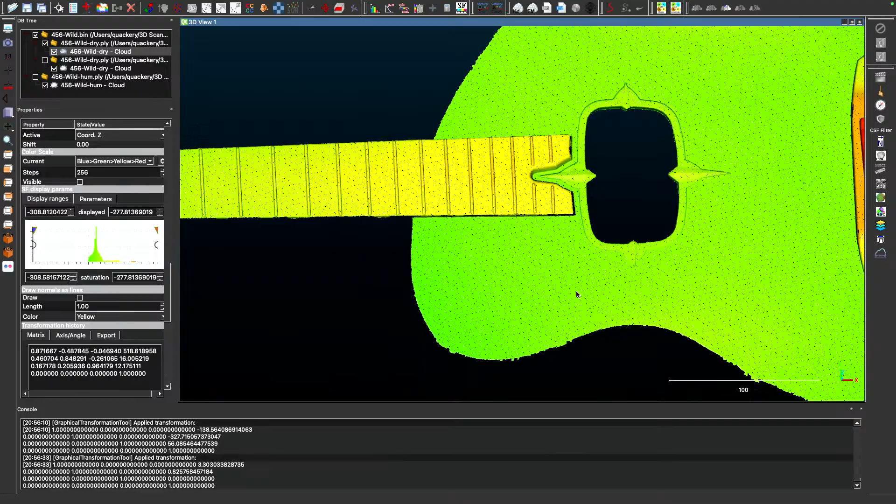But now we are going to look at the 3D scan. So we're going to look at two 3D scans. Aficionados in the house, hello to you. So two separate 3D scans that I made at two separate times, one before the rehumidification service and one just today. So why don't we look at that? So here we can see this is a 3D scan, right? And the one we are looking at right now is the guitar as it was when it was dry.

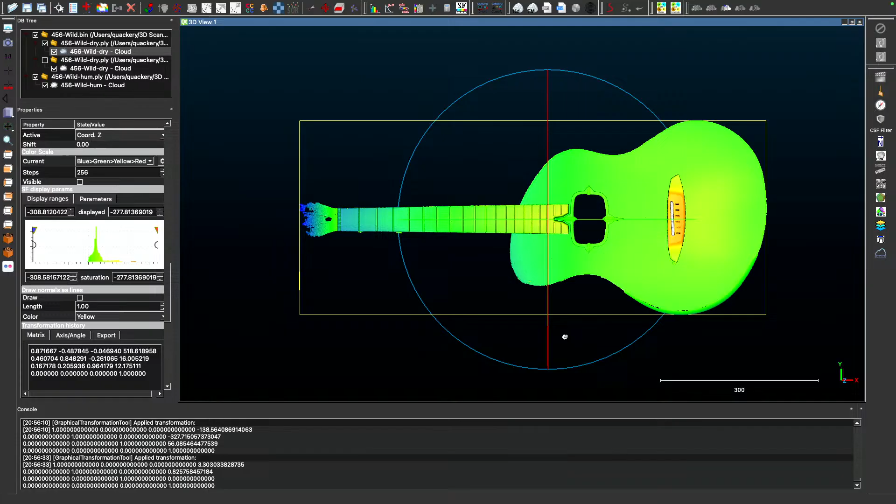So let's move it over here. Okay, let me reset the view. And here I'm going to turn on this one. So this is now a different scan that you're looking at. And they're one on top of the other. You see, I can turn off the top scan and turn it back on. Those are two different scans. So remember, the one without the headstock is the new one, and this one with the headstock is the old one. So I want to just zoom in on the soundboard a little bit and place it over here.

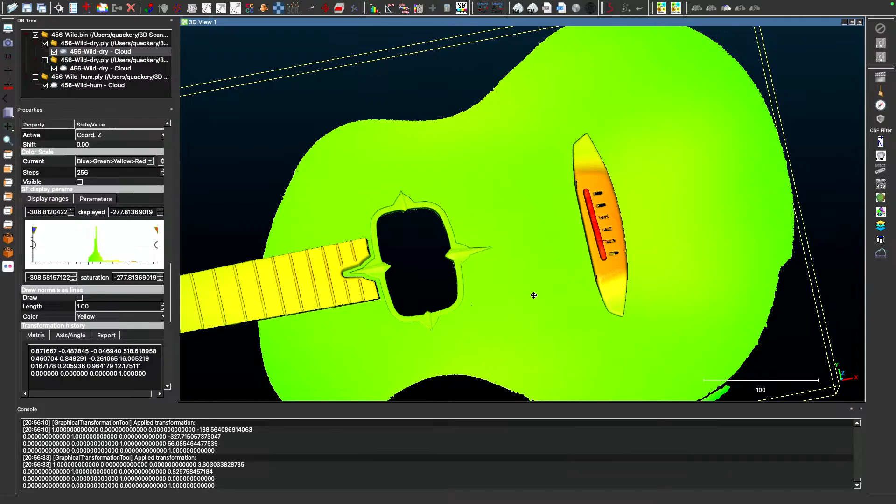Yeah, just like that. Maybe turn it this way. Okay, that's good. All right. So now let's look at the color scheme. So I'm just going to add a little blue here, maybe like this. And here let's add some red.

So red is highlighting the high spots of the soundboard. And let's put some more blue and green, red. You can see that. So you can see how the soundboard was collapsed in front of the bridge, and there's a hump behind the bridge. Yeah, it's going to always have a hump because of the string pull, but this is basically a collapsed soundboard, and we can see this here.

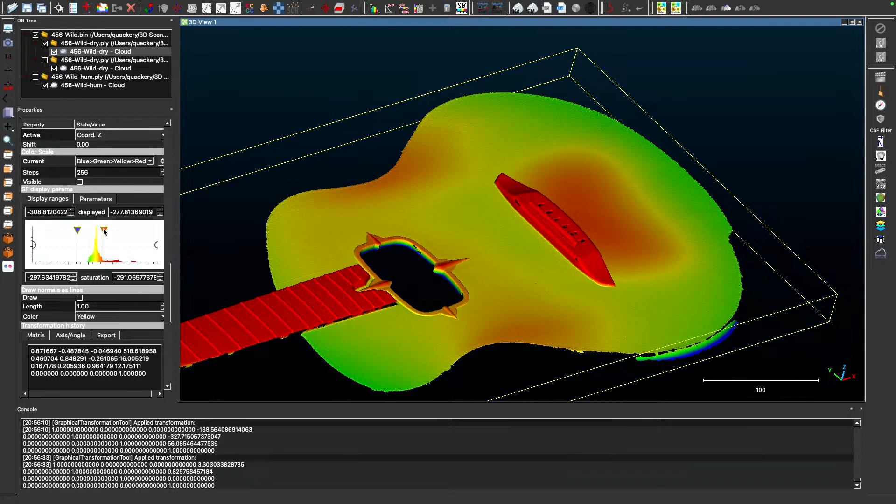That's the bubble, right? So now let's turn on, well, actually let me add some red, and let's adjust this level. Okay, so this, I just call it the gray level. This basically is lowering a flat plane onto the guitar. So the neck is at an angle, so don't pay attention to that. It's a different type of acoustic guitar. The neck is at an angle like on a Les Paul.

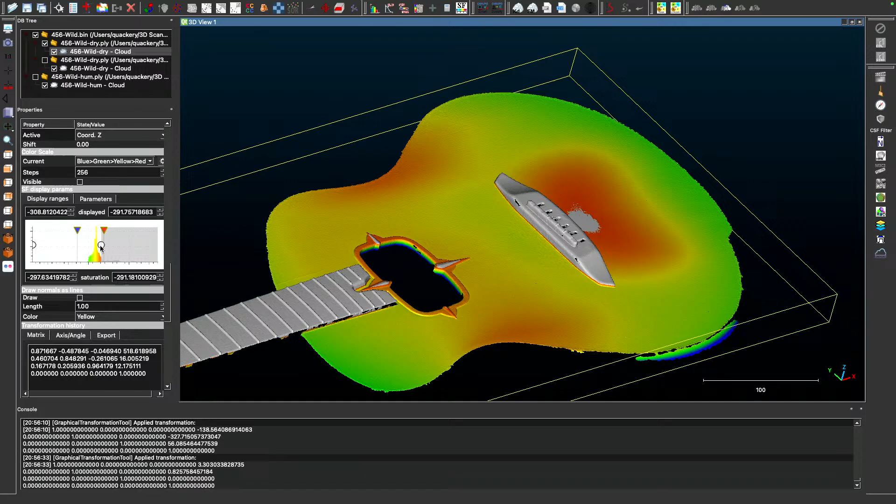And now we are going to highlight the high spots. So here we have some high spots right there on the side, here, and then here, and here. And here we have a low spot as well as here, right? So if we add some red just to kind of highlight it, this is what we have. I can adjust the blue or the green. It's not really needed, but this is it.

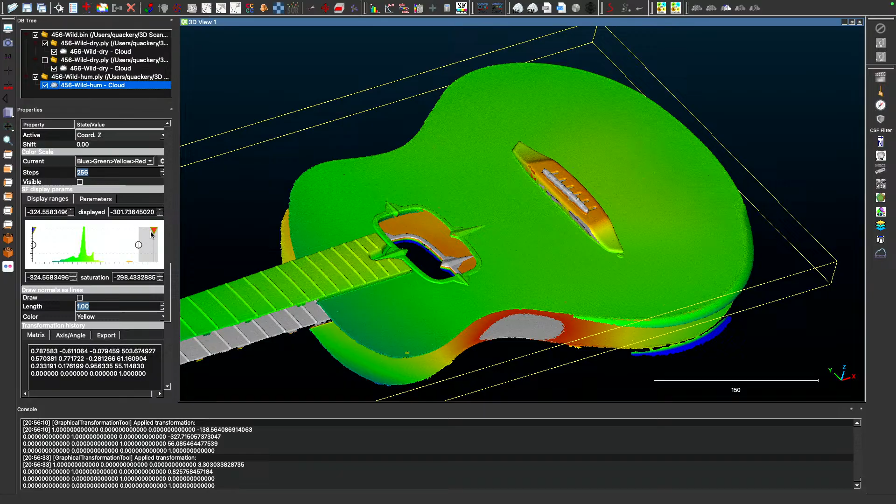Okay, so now let's turn on the scan from today. Okay, this is this one, and I am going to now highlight that one, and I'm going to do the same. I'm going to adjust the levels, maybe add some green over there. Okay. So you see we have a different situation altogether. So now if we add this gray level, you can see how we have a different spread of that.

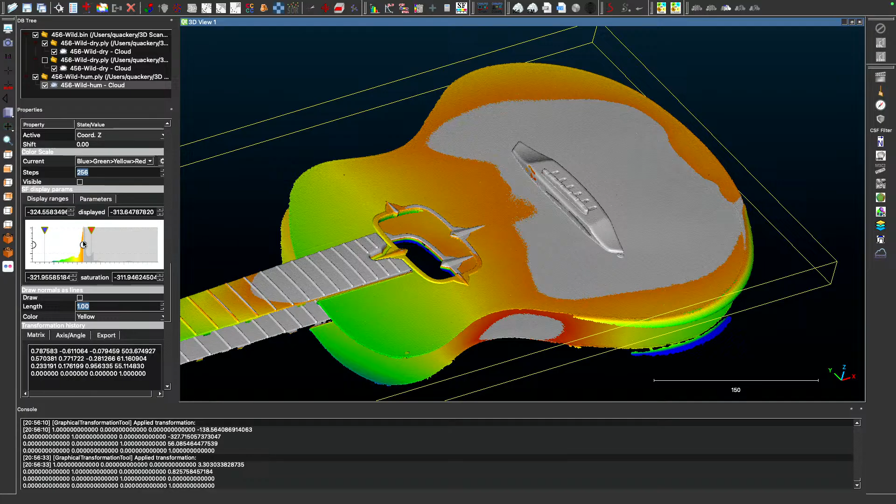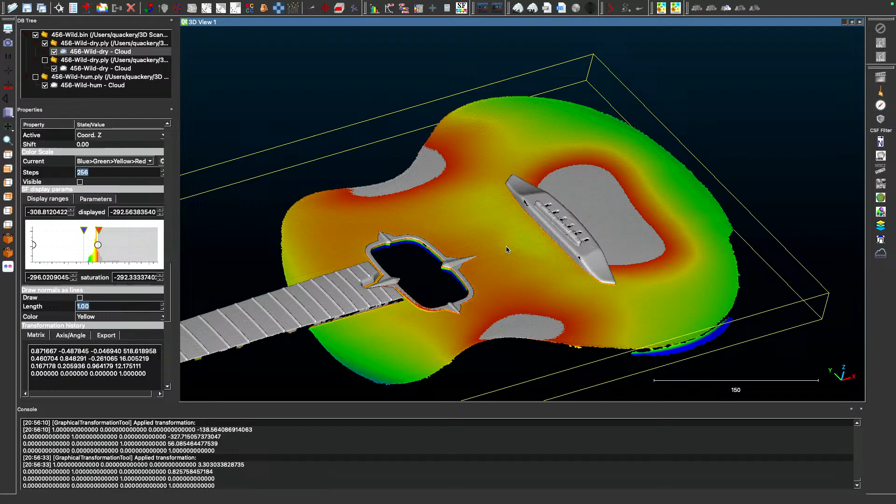Okay, so we no longer see a collapsed soundboard like we were seeing on this scan here, that's the previous scan before the humidification, where we have this collapsed area right here. Instead, we see this. Okay. Now, this is pretty self-explanatory. So now the soundboard is raised in space. Okay.

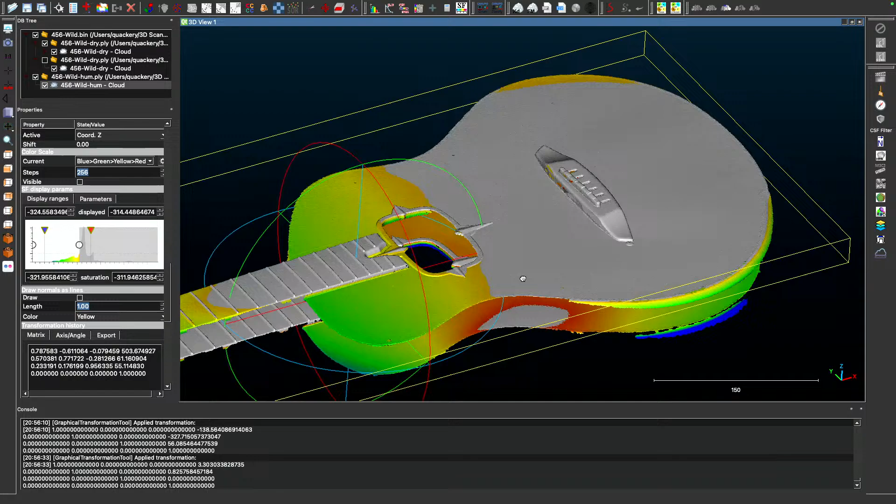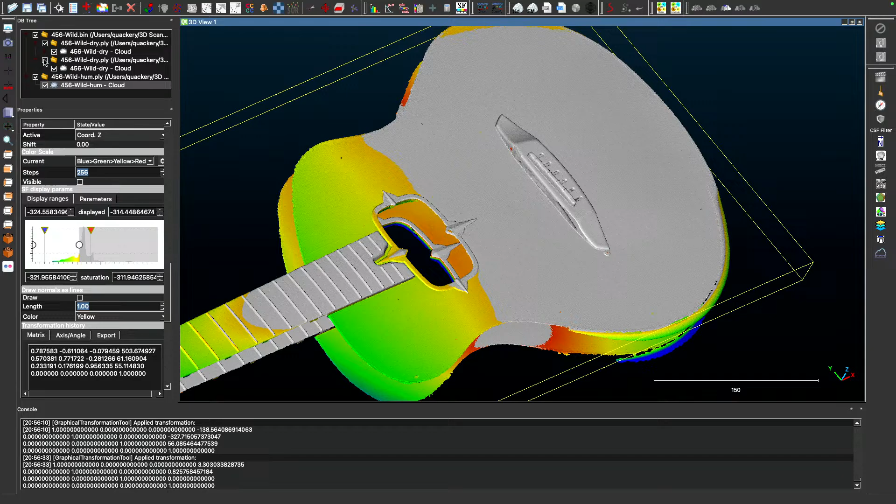Yep. Okay. So I can do more 3D analysis with these scans. I can use a different software called Fusion. And I can also take some measurements, and I can kind of predict the outcome of the service, because we'll be doing a level crown and polish and a full setup of this. Now, for the level crown and polish, I actually have another scan right here. So let me turn this one off, and turn this one off, and turn this one on.

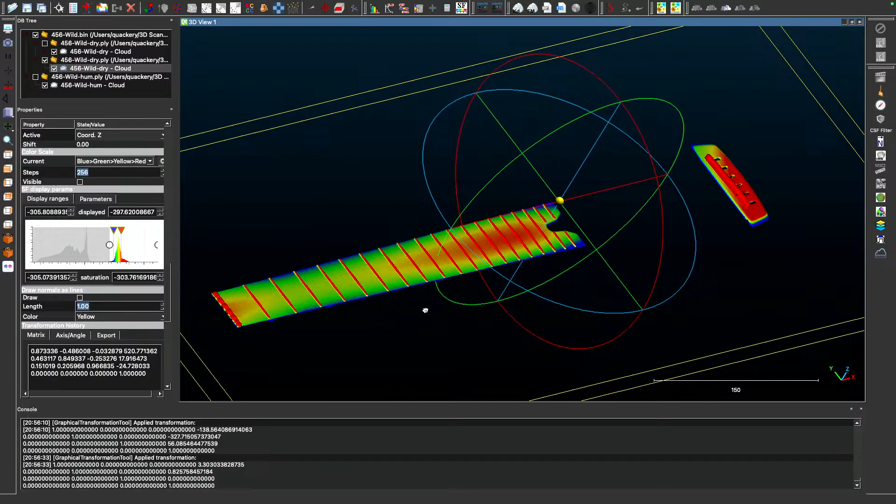So this one, we already looked at this one in one of the previous live streams, where we were adjusting these levels, and we were looking at the fingerboard. Okay. And we see that right here we have this low area.

Now I'm not going to go over everything again, because I did do this in the second live stream on this playlist. But I am going to look at these scans a little closer before I do any work on the fingerboard, and just to kind of predict the outcome of the service that I'm doing on the guitar.

That's that. So I don't think that I will be live streaming the rest of the services on this guitar, because I just kind of am doing this for the 3D scans. But it's going to get a level crown and polish, maybe a new saddle or something about the saddle. So if I do any kind of work on that saddle, maybe I'll be streaming that, and then a full setup, and that's it. So there you have it.